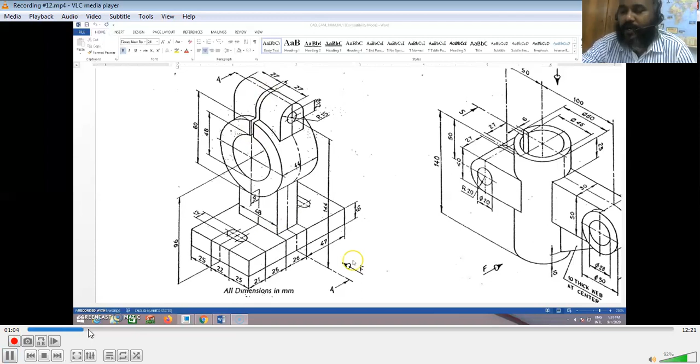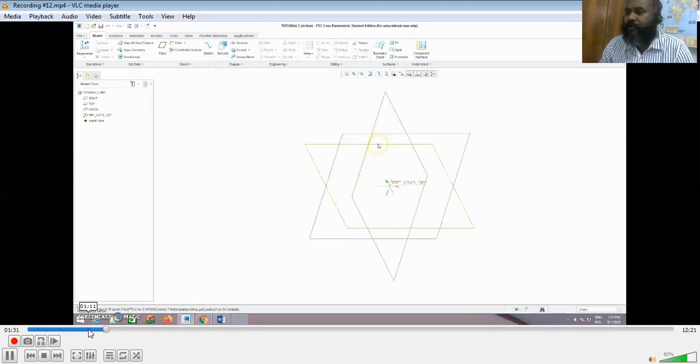Moving on, we go the usual way of starting the sketch. I'm naming the part - call it as per your convenience - and choose the plane on which you are going to draw the sketch. I have chosen the sketch view.

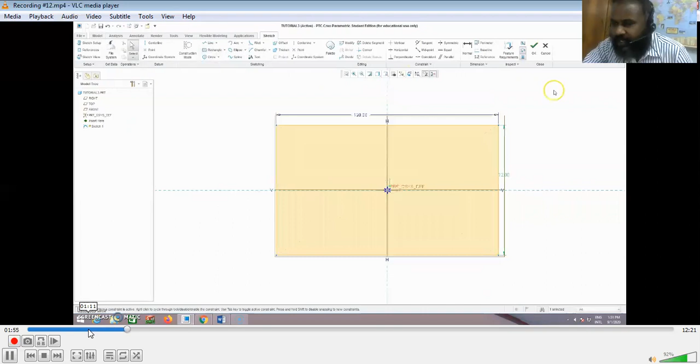The first thing I'm going to draw is a rectangle, the base. I've chosen the center point based rectangle, and I'll change the dimensions accordingly - one side was 120 and the other was 72. I've extruded it to the prescribed height, around 18 if I'm right, and now I have to do the second part.

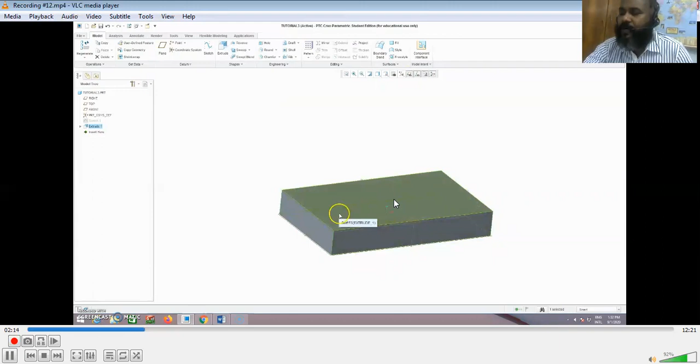For the second part, what I know is the circle hangs in the air at a particular height from the ground. So I can extrude the concentric circles, and then on the surface of the cylinder that I get in the air, I can draw the remaining part of the vertical post, which connects the circle to the base we created. This is how I'm planning to create it.

This is not the only way to create it - there is no one way. You can choose your own approach, but I'll give you the reason why we are following this procedure a little later.

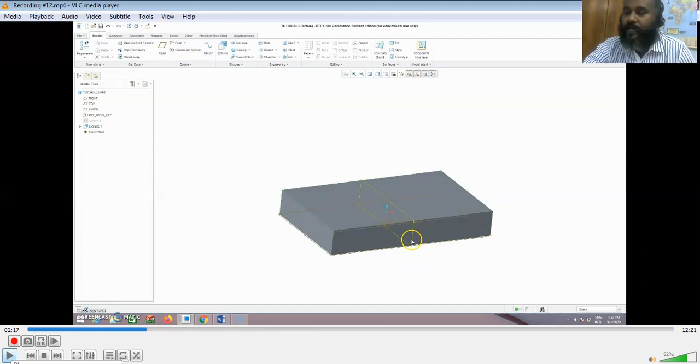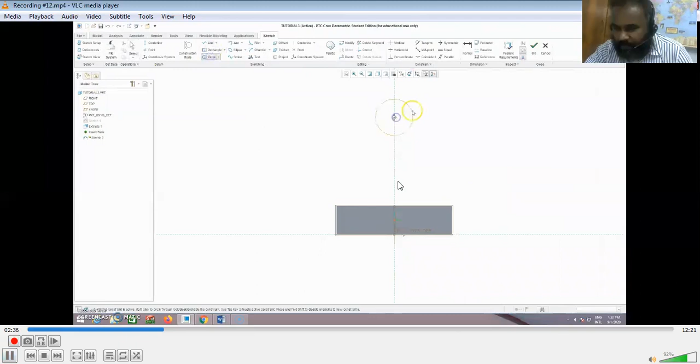Let us get on with finding the plane on which I'm going to draw the concentric circle - it should be the middle plane, vertically placed. I've chosen that plane, and I'm going to draw the circle there at a prescribed height from the bottom. How much is the height? Around... not able to read it.

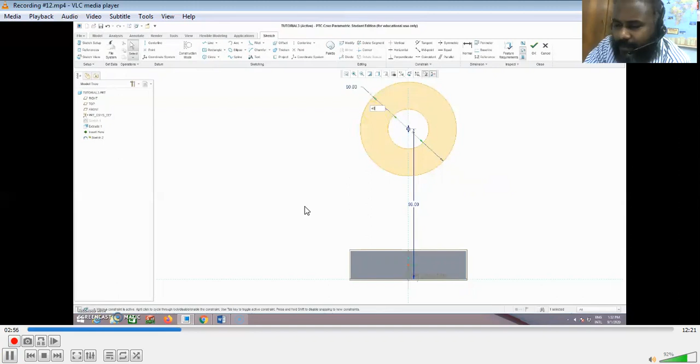So the concentric circle is made into a hollow cylinder of a certain thickness, and I'm adjusting. I'm not going to explain inch by inch. I think right now you're well prepared to do it on your own. This is just to guide you if at all you face any problem midway, so that you can come back and fall back on this. You're supposed to do all these things on your own. So dimensions and other things, kindly take care of them from the original sketch given in the manual.

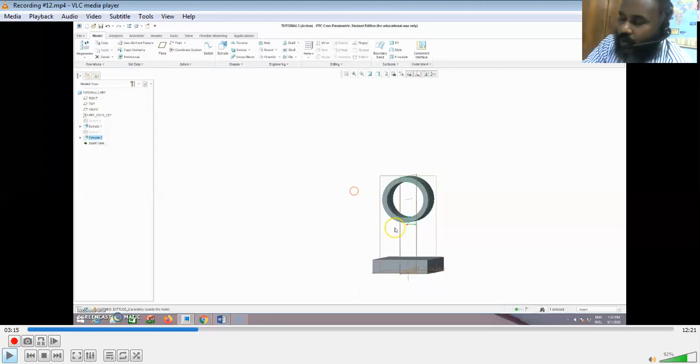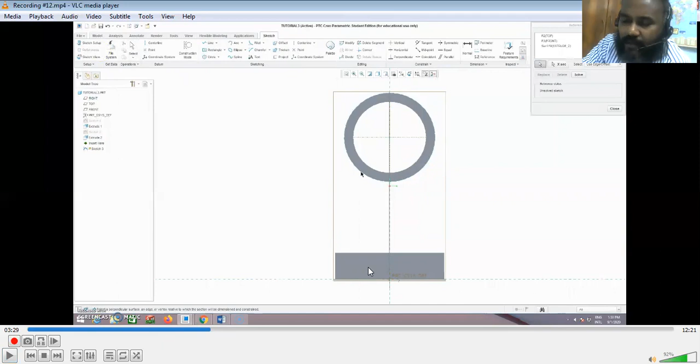So I'm done with the creation of the hollow cylinder, and it is floating in the air. I'm going to draw the vertical post, which will connect the hollow cylinder to the base. I've used the reference feature to create a point on the outer circle so that I can draw a line from that point down. That is the first line for the vertical post. I'm not able to create a connect at the bottom, so I'm using the same reference again to redo the line. Do the same thing on the other side. If you have features, you can connect them, or you could use the reference to pick up points.

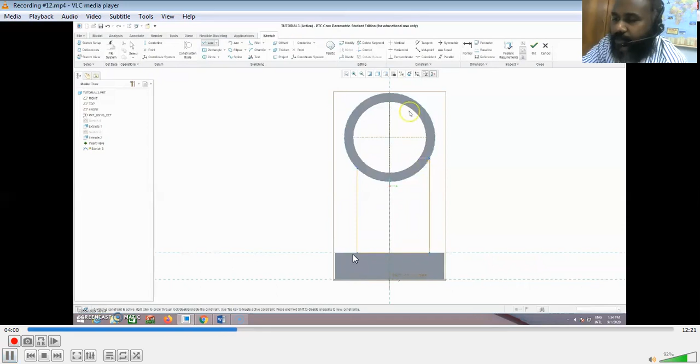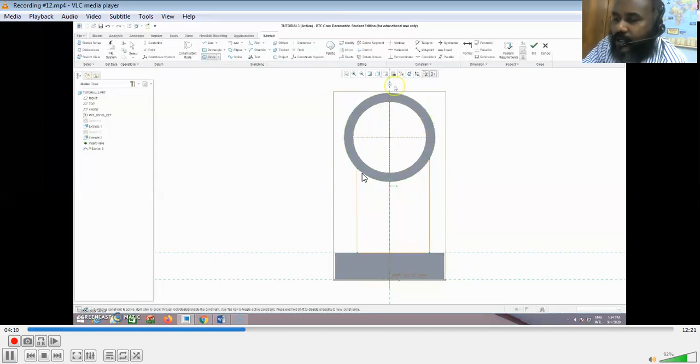So what we are going to do next is, I could as well have made a rectangle here, extruded it and cut off this semicircular part. Instead, I'm going to draw a curve here. These two lines, the third line, and this arc, which sits right on the surface of the cylinder, these four features will make a closed shape. I'm going to create a circle here to here, cut all the remaining part and leave only this part, and that will give me a closed part. This pink thing shows me the closed feature I've obtained.

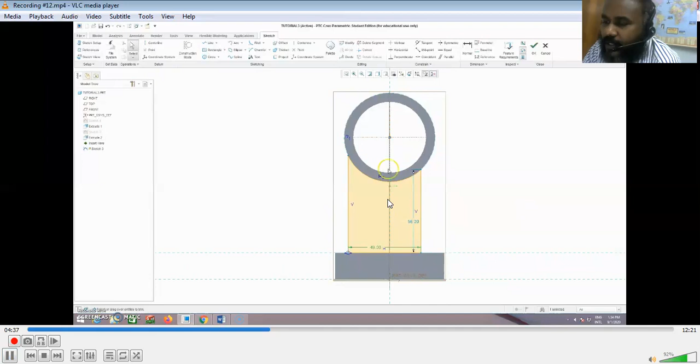I have to keep the distance uniform since it is a symmetrical feature. You fix the corner to edge distance, and then the internal distance. The remaining distance will be symmetrically placed on its own because of the constraints of the original sketch. So I'm going to depend on that. For symmetrical placement, the pink part is now offset to the left side, and I'm going to push it to the right. First, fix the edge to corner distance. The distance from one edge to the next is already fixed.

I wanted to mention this. If you see, there is no additional feature which projects beyond the outer surface of the cylinder. This beige part doesn't enter inside the cylinder at any part. If you follow any other way and it projects inside the cylinder, you can cut it after you create it. But the problem is, what happens to the material merging with the thickness of the cylinder itself? That you cannot remove.

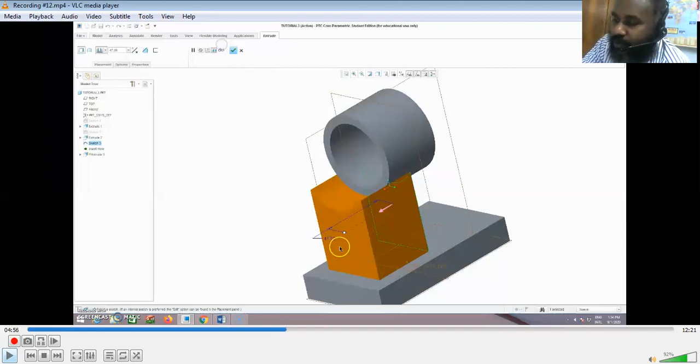Later, when you go for analysis and add mass to all this material, that hidden material merging with the cylinder will also add its own weight to the component. So you might be confused. As per your design it might be 1.1 kg, but because of this modeling error you might get the analysis based weight to be 1.2 kg, which is a gross error. So it is always good to follow this methodology. Kindly understand this part. If you cannot understand in one go, watch my explanation once again. I'm just going to move on.

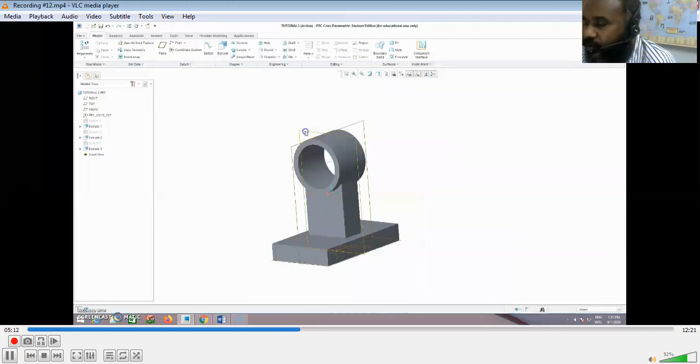I'm going to extrude it to the prescribed thickness, and that completes the bottom part of the vertical post. On the top, there is a through hole to be made for the bolt and nut to pass through. So how am I going to construct that? Again, I'm using the same plane on which I drew the bottom vertical post. The procedure is going to be the same.

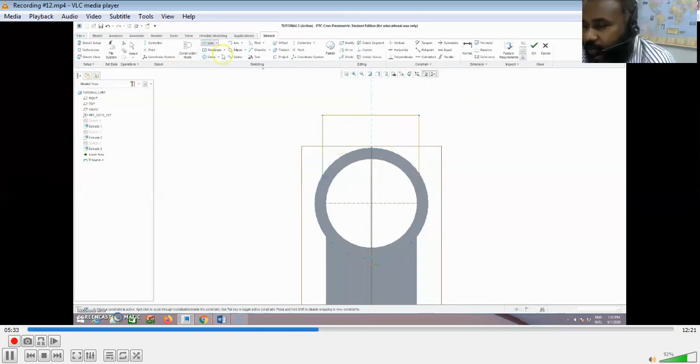And the next thing is I'm going to draw a circle and remove all the unwanted part. And the remaining part will give me a pink color closed cross section. So that I'm going to extrude. That is what I'm going to extrude. So you know the thickness to which it is to be extruded.

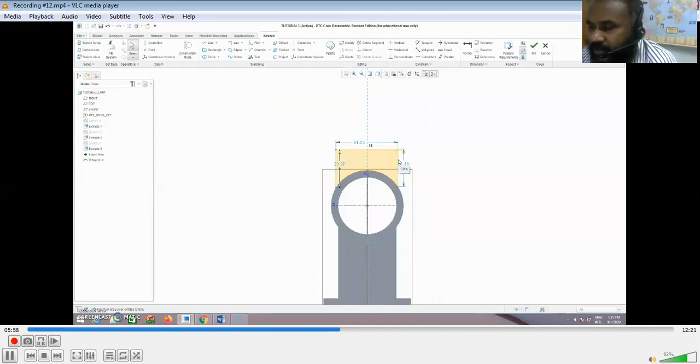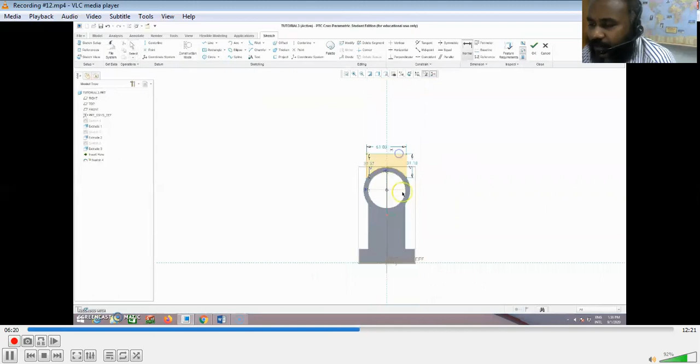If 15 is the dimension of the radius of the semicircular curve, you might have to extrude it for 30, right? So once that is done, that's what is being shown here, R15, so diameter will be 30. So obviously the width of the extrusion will be 30. And the height at which the center of the circle is to be placed is being formalized now. Even the topmost feature, the edge, is formalized now.

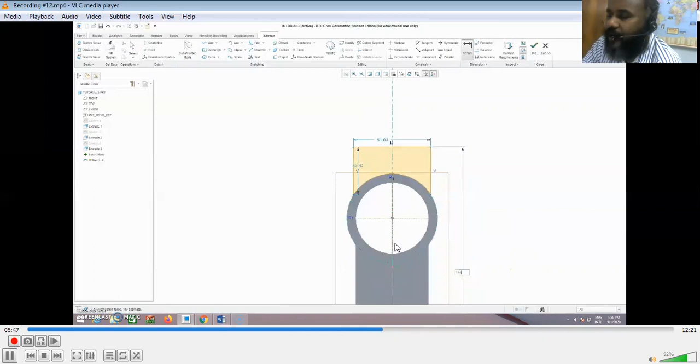So once all these things are done, you are making it symmetrical from one edge to the next. It should be aligned with the center axis of the already built part of the component. So that is being adjusted. Everybody can have your own way to do that. There is no one way to get it done. So we are just trying to offset it, make it aligned to the center. So a few steps it takes.

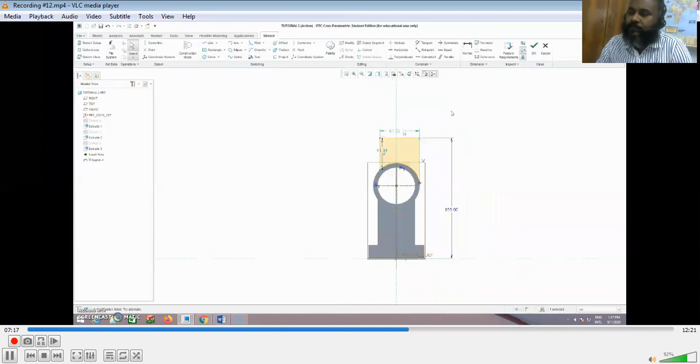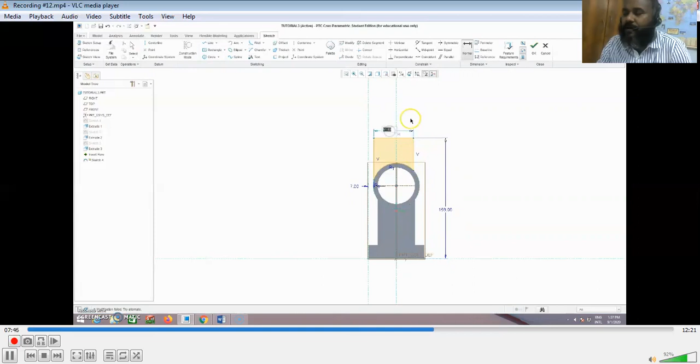So as usual, I'm aligning it one corner and the edge. If that is done, it is going to move to the left, and then I can control the width. Yeah, it has moved to the left. I'm going to control the width or length of the cross section. So once that is done, now it is complete. I'm going to extrude now.

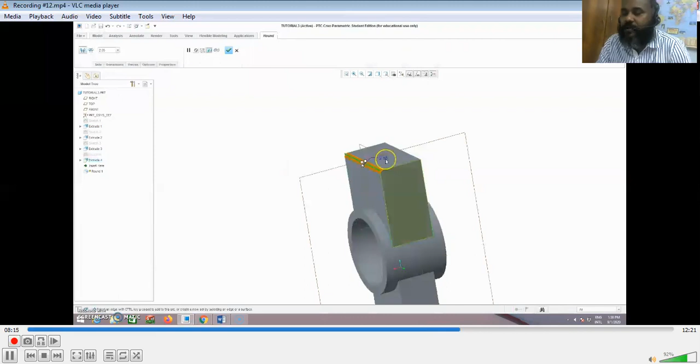So after extrusion, there is no interference of material. So the baseline has to be adjusted for symmetricity. You know where to do it. Once that is done, the edge has to be made round, R15. So I'm going to use the round feature from the engineering tool. So both the edges have been rounded, and I'm going to make the hole now, using extrusion or the hole feature, whichever you prefer.

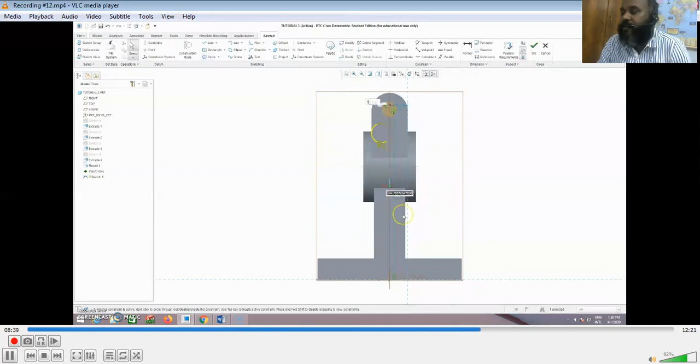So I'm going to draw the circle and extrude it. You have to change the diameter of the circle to 12. The center is matched. It is a concentric circle with the earlier arc, that semicircle that you have made. So I'm just changing the direction of extrusion and matching it with the edge. And yeah, so that part is done.

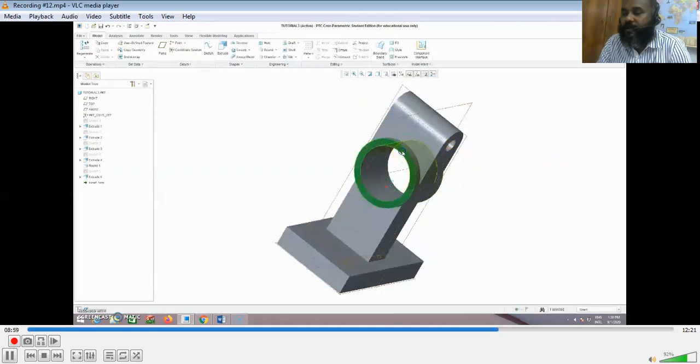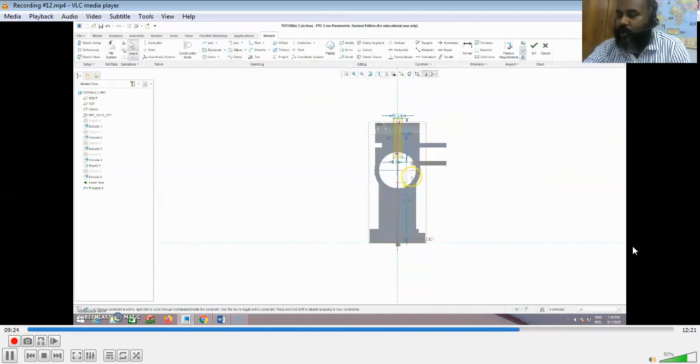So next thing is I'm supposed to draw the slot. I'm going to cut it here. At this place, I have to cut it for 4 mm thickness if I'm right. So I have to draw a rectangle in that plane and extrude it. This you can do on your own, I suppose. You have to align it to the center. All those things you should take care. Once it is aligned, the thickness on both sides will be equal from the center line.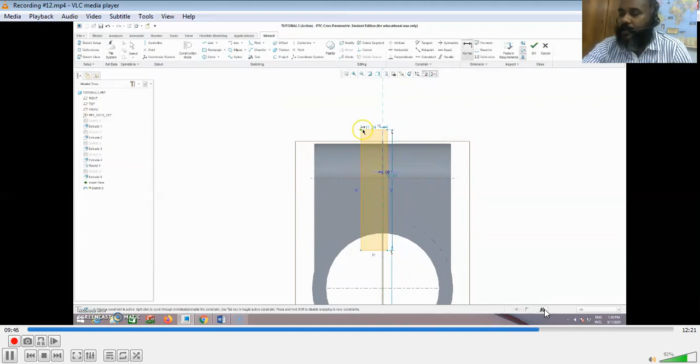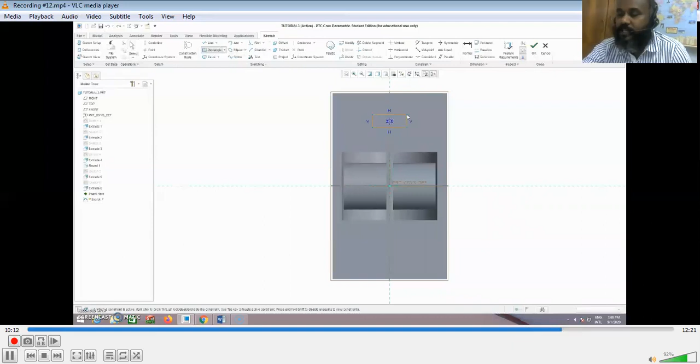So once it is extruded, the cut part is obtained. After that, the only thing left is the slots at the bottom, 2 semicircular slots for the bolts to be fixed. So I can choose the top surface of the base plate and draw that part. I'm going to skip the video a little ahead. Draw the semicircles at the end of the rectangle and extrude it. So you get the first slot.

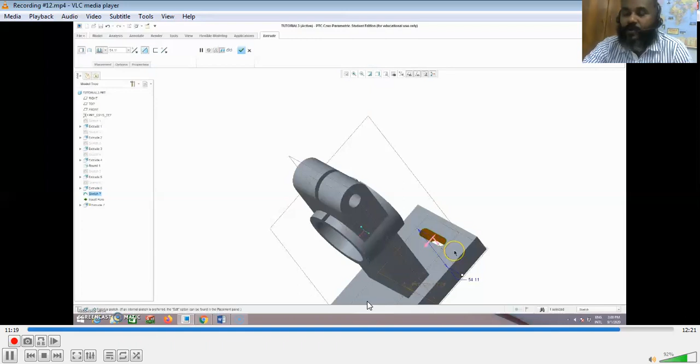Once this is done, you can use the mirror feature to mirror this slot on the other side. You know how to do it. Use this vertical plane as the mirror plane, and just click the mirror part. It is going to create the slot feature on the other side, as explained in the earlier videos. So I think we have come to the end. Hopefully it is rotated. Okay, this video I'm stopping here.

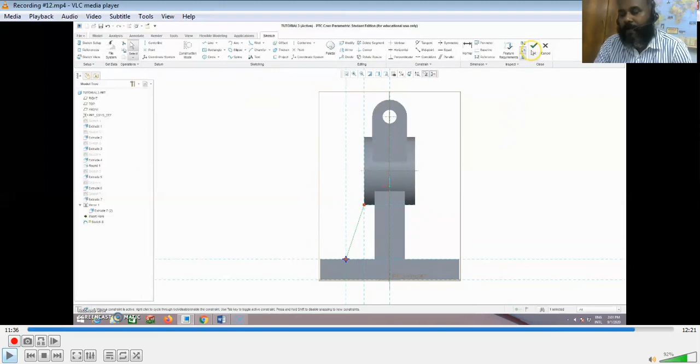Actually, we thought of explaining how to make a rib, which is not asked for in the exercise. So I'm just going to stop here. You can go ahead, try doing it on your own. If you face any problem while you create it, come back and watch the video and see how we have solved it. This should give you the start to go ahead and solve. In the second video, I won't be talking in even this much detail. It will be mostly the video alone. So it is for you to think and fill the space.